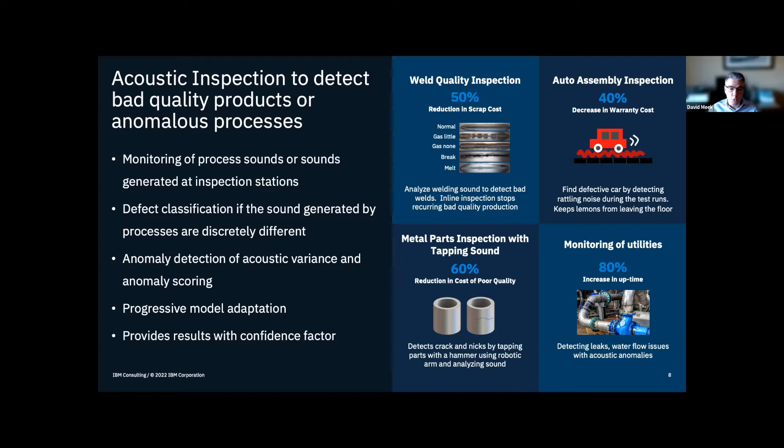Other use cases are using a robot arm to tap a bearing race, for example, and know whether it's cracked. This is big in ceramics and others. And then we also use it to monitor rotating equipment and others, to give early warnings to bearing failures and lubrication problems.

New in manufacturing and remanufacturing, we see a lot of the simple use cases have been done. More and more of the complex use cases require multiple models to get the performance output as needed. Here's a case in point: this is an auto frame and body company. They make frames that go into many of the popular pickups that OEMs assemble and sell here in North America.

Typically for all their welds, especially MIG welds, the only way they know if they're good or not is if they tear down the weld and cut it and etch it to make sure it has the penetration. They might do this once or twice a shift, but they might make 1,200 frames. So they just have to surmise that if it passes the QA test, all the frames are okay, and if it doesn't, they remediate all the frames. So there's a huge cost to that, and there's a huge cost to the OEMs if the welds begin to break due to incomplete welding in the field. All you have to look at are some of the more recent OEM recalls for frame welding.

So we've tackled this a different way with this manufacturer: let's look at every single weld. There might be 300 welds on, for example, an F-150 frame. Let's look at it using visual inspection with infrared cameras so we can see the heat and build models for the individual welds, their paths, and the heat penetration.

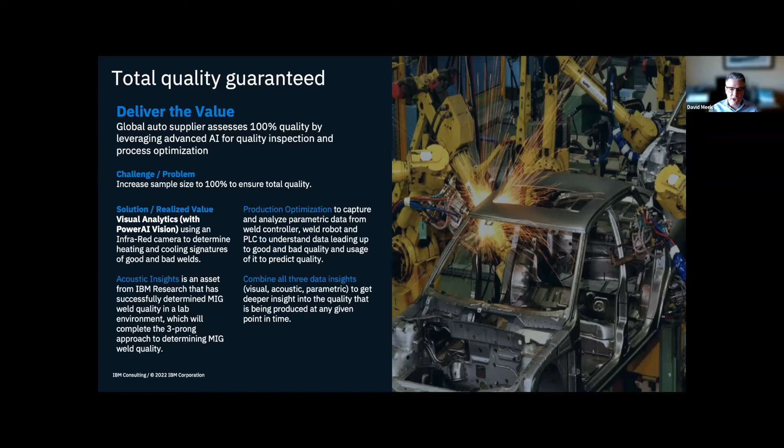And with these, we use 11 different AI models to be able to come back with a 90+ percentile and say, this is a good weld, keep going. It also uses anomaly detection to say, hey, you normally use a certain amount of shielding gas or a certain minimum current through the weld, and you didn't achieve that. So you need to check what's going on here, or stop the line.

With visual inspection, I'm going to go into more detail because that's used not only for automotive final quality. We're finding more suppliers and OEMs and remanufacturing using this to triage incoming parts. Is it complete? Is certain parts worn beyond repair? That early triage can have an objective view, freeing up people to handle borderline cases or make more value-added decisions.

This is launching a new line of vehicles. The workers are new, the vehicle is new, and they end up with a lot of quality issues. So what we've done here is just use an iPhone. It's programmable by the end engineers—you don't need data scientists, you don't need a huge IT staff. They take pictures with the iPhone, create a model which goes to the server or cloud, where it can quickly build an AI model and send it back to the iPhone. We inference it there.

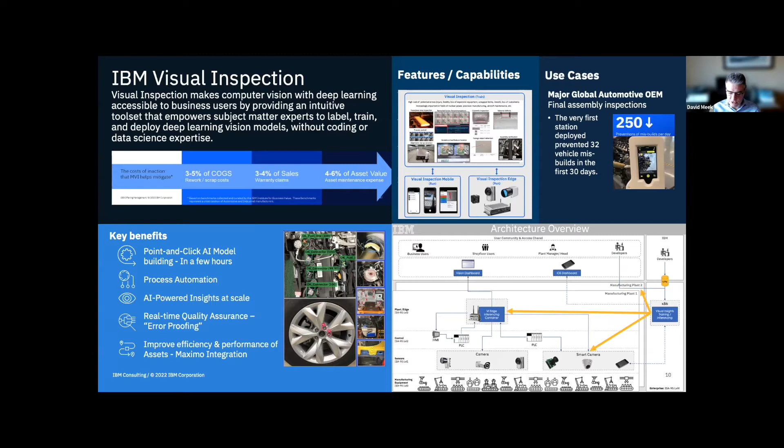We use a lot of other companies' computer vision besides IBM's—we tend to use whatever the client has a preference for. We have a lot of clients on AWS and Microsoft Azure, for example. Both have different computer systems. Just about every provider of computer vision has pros and cons, strengths. Sometimes it's a very IT, data science focused tool; other times it's very user-friendly. But the downside is it can only be used for very simple use cases.

And with that, I'm going to turn it over to Jim Little. He's going to walk through a process or reference that we use for remanufacturing, and an important aspect as you begin to apply AI to an existing remanufacturing process.

Jim? Okay, hey, thanks David. I'll do an audio check with you—coming through okay? Yes. Oh, perfect.

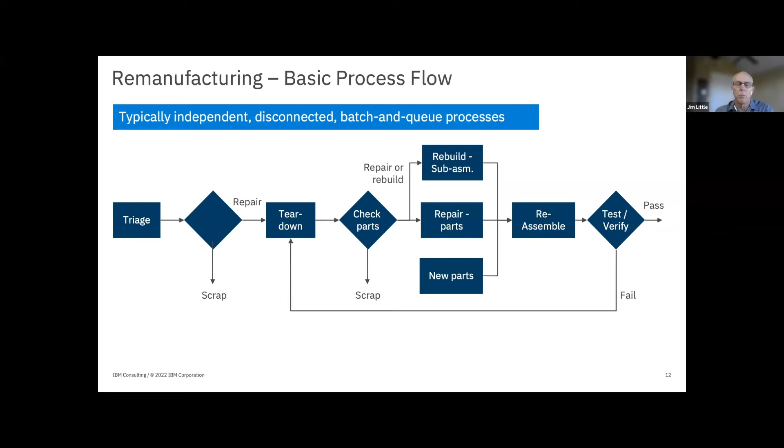But things flow through. Things come through, they get worked on, and they come out with success at the other end. But as part of, or requisite to, the technology application, I want to share a success story that cleaned up some of that base level kind of work first. So David, next slide please. Yeah, thank you.

So I've entitled this an Industry 3.0 kind of application, but really the message we want to convey here is building upon the ML, machine learning, and AI application, challenging organizations to think about building upon solid fundamentals, right? Make sure the foundation is right before we begin to build the next layer of opportunity on top of that.

In this particular case, the organization had much of that traditional flow I talked about earlier, where we didn't have people engaged, we had batches that were disconnected, et cetera. The focus over this 15-month journey, with multiple passes through it, was really around building what we call manufacturing, remanufacturing fundamentals, right? Thinking of the lean principle application of visual management, flow, value add, engagement of employees, problem solving, built upon daily management systems, et cetera.

And by honing that and really driving those fundamentals, those foundational kind of items, in place at the basics level, with crazy focus, rigorous focus around flow at takt time, we're able to establish these kind of breakthrough metrics. If you think about producing an asset now, remanufacturing an asset with less than 25% of the effort it used to take, 35x on the output or the volume side. Think about the lead time satisfaction for customers that feeds all of that. The business benefit that comes from building and executing on that solid foundation is pretty astounding.

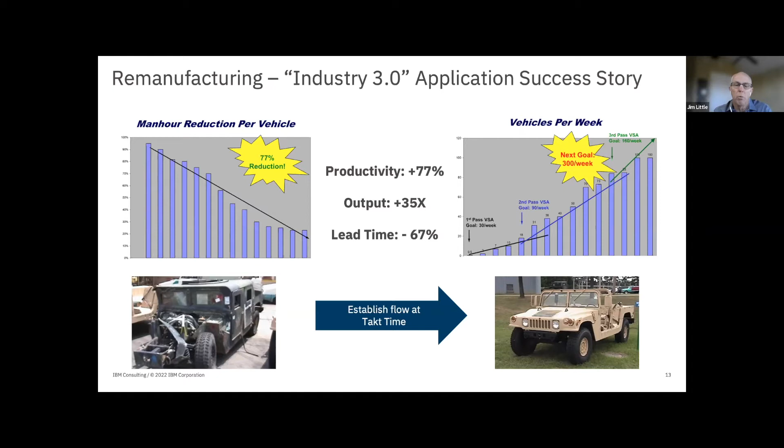So the lesson here we want to convey is the rigorous application of the basic principles at the Industry 3.0 level work before stepping into, or as requisite to, adding on top of and leveraging beyond with that piece into the 4.0 realm. And I'll give an example now of even better, or building upon that, if I could, David, on the next slide.

Right? So those familiar with value stream analysis and value stream thinking, it's the flow of information. And where can we apply the intelligence to get real-time feedback into the operations that support the flow that provides the value to the customer? And all of those insights, whether it's from the acoustical or the visual or thermal or energy consumption, et cetera, around that, where are those point solutions going to enable flow through the overall?

For example, technology on operation B can help improve that, but if that only bogs up at operation C or D downstream, are we really providing value to the end user through that application? What liberates the capacity is the key we would think about to create that flow. But everything from the cycle time to feedback on asset-specific instructions.

We learned this earlier on the activity as we were doing teardown. Let's consider or look at the other side when it comes through on the reassembly. All of those thoughts tie back in very strongly, I believe, to the idea of where the application is most appropriate, but certainly connecting knowledge so it flows with the unit and the product to the people who add value, the operators in the disassembly, repair, or reassembly, so they can make better decisions faster, higher quality output, and it really just leverages it even beyond on the business outcomes that you're trying to drive.

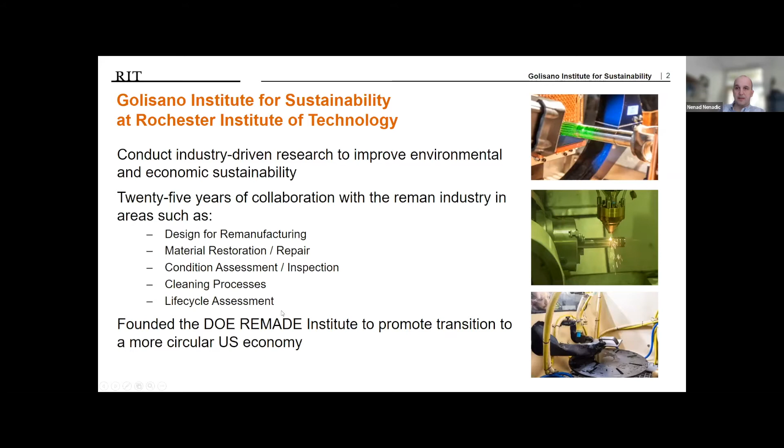We were leading the team that proposed to the DOE the Remade Institute, which is now promoting transition to a more circular economy. The material that I'm going to present today is part of a Remade project that was a collaboration between Caterpillar, CoreCentric, and RIT. This specific topic will be machine learning for health assessment of LEDs on printed circuit boards.

So this is more specific and more in detail, far less in breadth than what David presented, but one can see it as a template for some homegrown development of machine learning.

So the way we understand this business case and motivation for the machine learning is to enable automation and primarily improve efficiency. Those are somewhat widely considered good starting use cases. In this case, to speed the processing of PCBs.

Specifically, these operations like CoreCentric are largely manual right now, and they rely upon training technicians, and some of the tasks have become tedious. Over time, they make more errors as the day progresses because the repetitive tasks are not best suited for people.

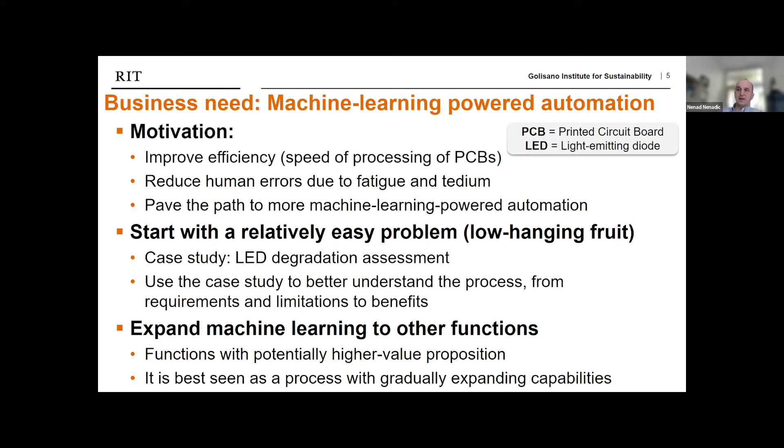So one of the commonly accepted approaches is to start with a relatively easy problem or low-hanging fruit that would allow us to complete and make a difference over a short period of time, and also give stakeholders an opportunity to see the process, then we can tackle higher value problems in the next round. This example that we're going to go through will illustrate this process.

As I said before, the specific goal here was to take pictures of PCBs and then isolate individual LEDs and assess their health. We have 3 PCB types. 2 of them are currently being assessed using visual inspection, and the third requires electrical test.

And the motivation is just as was described in the previous slide. Technicians take some time to train. These skills are not always perceived as high value skills, and the tedious nature of some of these jobs is a good opportunity for machine learning to improve the speed of operations and even long-term accuracy.

So there are, from a technical perspective, 2 machine learning models, 2 tasks. One identifies LEDs on a picture of a printed circuit board, and the second assesses the degradation related to that LED. Our approach was to put together a quick end-to-end workflow, starting with image capture.

Then isolating LEDs from the pictures of PCBs, and finally adding the health assessment. So we put this workflow together quickly and then iterated to improve upon the solution. We'll go through some of these in the next slides.

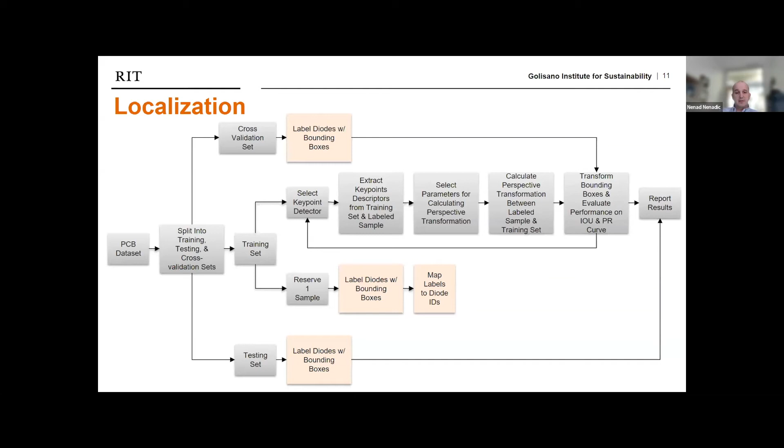I'll include a little bit of detail here on how we approach this. It starts with initial data collection—in our case, those are LED images. And then we try different models.

Then we train to adapt the models to the data, and then we validate it with different data, and iterate with a couple of different models. Sometimes we realize we need more data, so we expand the data set.

Before deployment, it's good practice to use a third data set that has not been used before. After deployment, there is opportunity to either expand the solution or sometimes adapt it. For instance, in predictive maintenance, models are more sensitive if they get recalibrated between maintenance intervals.

So here is the training. This is maybe a little bit too detailed, but it's just to illustrate the process. We typically split the data into a 70-30 ratio for training and validation.

In our case, it's often the case that the physical objects—in our case, diodes—have to be either fully contained in the training data set or in the validation data set. If they're split between the two, we will get misleading good performance, because these are very large models and they can easily memorize everything and then generalize poorly.

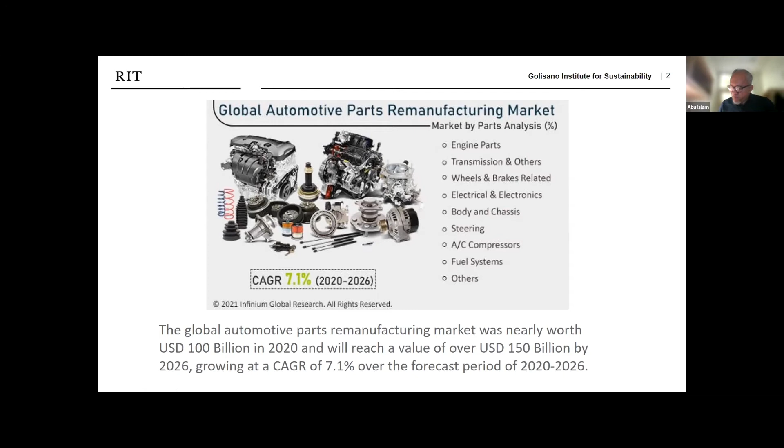As you can see, all kinds of automotive parts are slated to be remanufactured—engine parts, electronics, body parts, and so on. So it does warrant attention from the research community to improve its accuracy, efficiency, and to some extent, safety as well. So how are these parts collected?

Traditionally, these days the cores—the automotive parts coming in—are collected by what's called core brokers. Typically, they receive these parts in pallets, intermingled, and that's how they deliver them to the remanufacturers. What the remanufacturers have to do is then almost manually first sort this by type.

For example, is this an alternator? Is this a brake shoe? Is this a fuel injector? And then they have to sort them by model number.

And it takes time. Typically we've heard from one of our partners, Dieselcore, that in a minute they can do maybe 2 to 3 brake shoes, and their accuracy is probably in the low 90s. So they'd like to improve the accuracy and reduce the time in this classification.

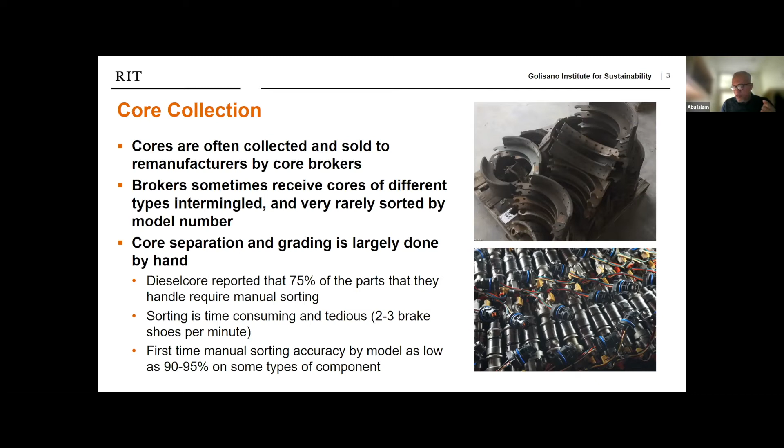So our goal in this project, in the first phase, is: can we separate or classify these parts into broad categories? For example, these are brake shoes, these are fuel injectors, these are alternators, and so on. That's number one. Then within each type, can we say, hey, this fuel injector came from Ford, this one is from Bosch, and so on—can we make this kind of classification?

And of course, we have to improve the accuracy to over 90%, with about 2 to 10 seconds per sorting time—that's the kind of guideline we got from our partner. In the long term, we'd like to classify these components based on their condition, how worn out they are, and we also want to identify if our system hasn't seen a certain part that comes into the inventory.

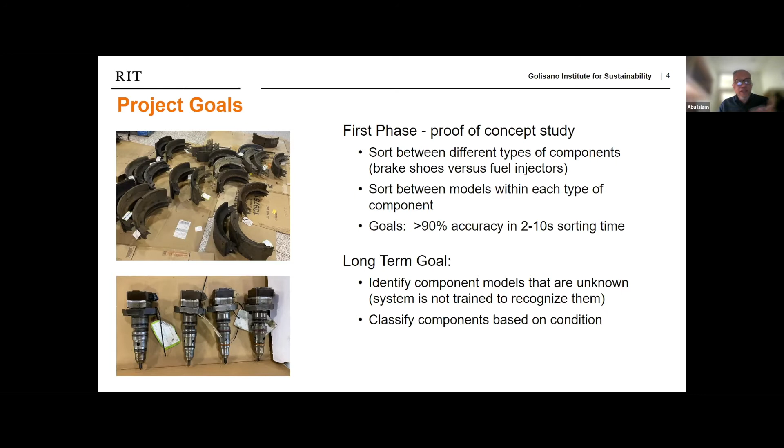So of course, as the title said, we are using a vision-based system. And for that, we need a lot of images for these parts. Typically, we don't get them from the field, so we have to generate them ourselves.

As we get these parts, we captured over 12,000 images. Our initial parts selected were brake shoes and fuel injectors because they come in large volumes, and they're also among the important ones to classify—that's what we learned from our partner.

The way we capture the images, we use a rotary table so we can collect images at different angles: top views, isometric views. Because as the parts come in on any kind of transport system, we can't say it has to be in a particular orientation. They can come in whatever orientation the user puts it in, so we have to be flexible to that. We capture images at different angles and also at different lighting conditions, because we expect that's going to happen on the remanufacturing floor as well.

We are using fuel injectors and brake shoes, and these are the different models we have in our inventory. For each of these categories, we have about 4 to 6 repetitions of the same model numbers. So that's the kind of parts and data we're dealing with in this work.

As Nenad alluded to, we are using transfer learning to improve our efficiency. Essentially, companies like Google and Facebook deal with millions of images to recognize faces, objects, animals, flowers, and so on. Not only can they classify, they can identify, and they've developed very sophisticated models. In the early portion of their model, they extract features from those images - horizontal lines, vertical lines, curves, circles - these are the kind of features used to classify objects. Since they have a huge database and have created this model, it makes sense to reuse that portion of the model in our work.

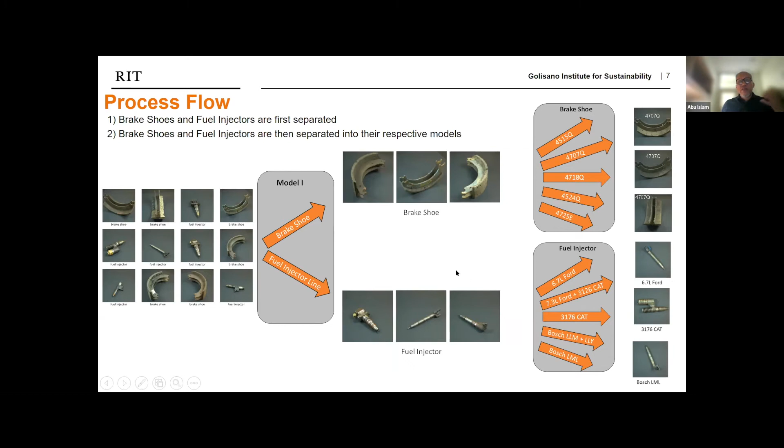Moving forward, this is the overall model we've used. There's a first model that classifies objects between brake shoes and fuel injectors. Once we've categorized them into those two categories, we bring in detailed models of brake shoes and fuel injectors, which subclass them into individual models. That's the overall structure of the modeling here.

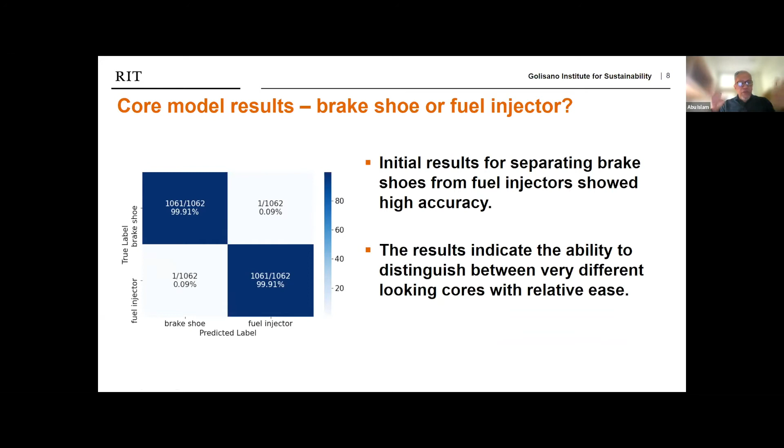Let's look at some of the results. As you can see here, to classify between brake shoe and fuel injectors we do very well - we're very happy with the results, over 99.9% accuracy in classifying between these two large groups.

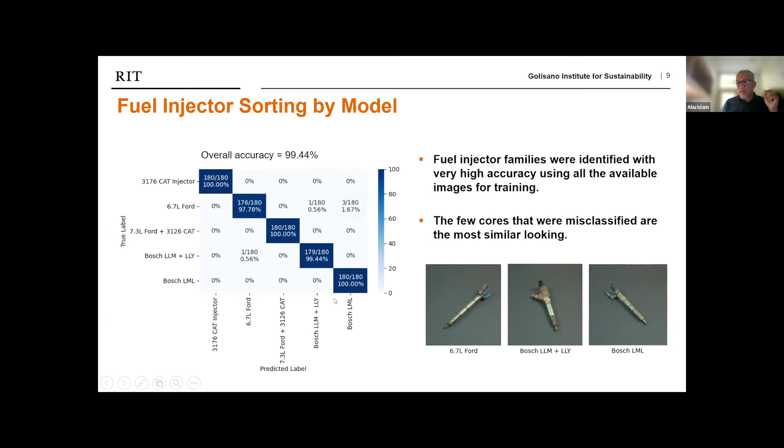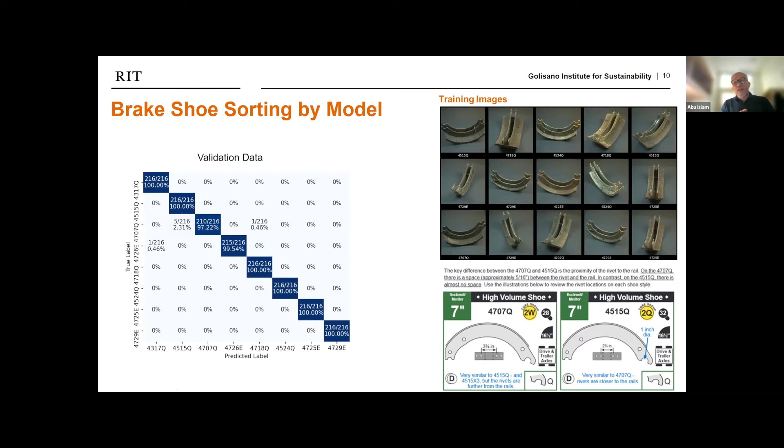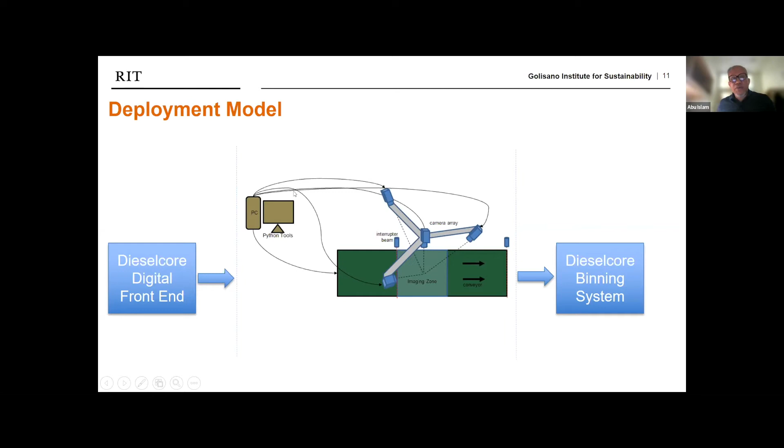We'll capture images and feed those images back to an analysis tool based on Python, as Nenad explained, and that will classify those parts into different categories. So in our labs, we have put together

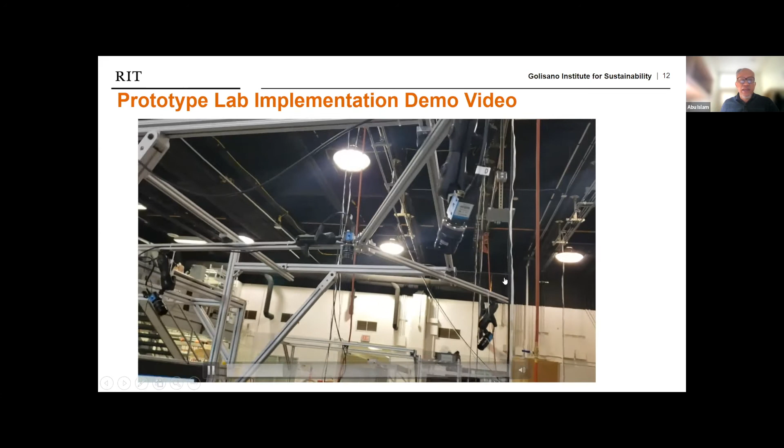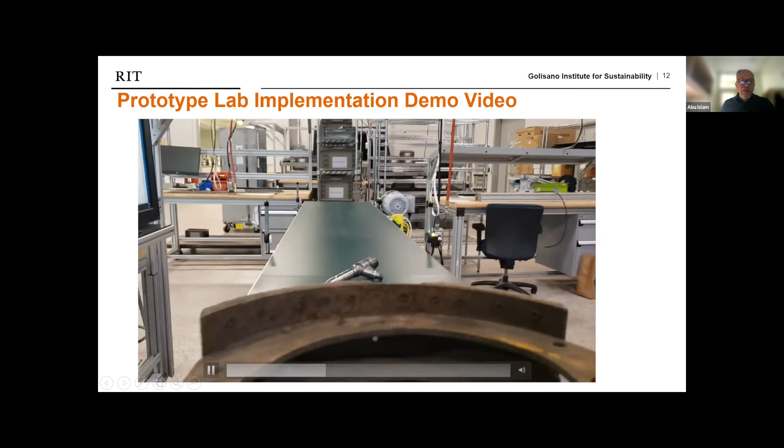the prototype. Hopefully the video is working for everybody. So this is a conveyor system, and these are our multi-camera gantry. This camera will take the top view, and these three other cameras will take the isometric view of the object. And in this conveyor, the operator will place the parts as they're coming in from the pallets, and these parts will go under the camera.

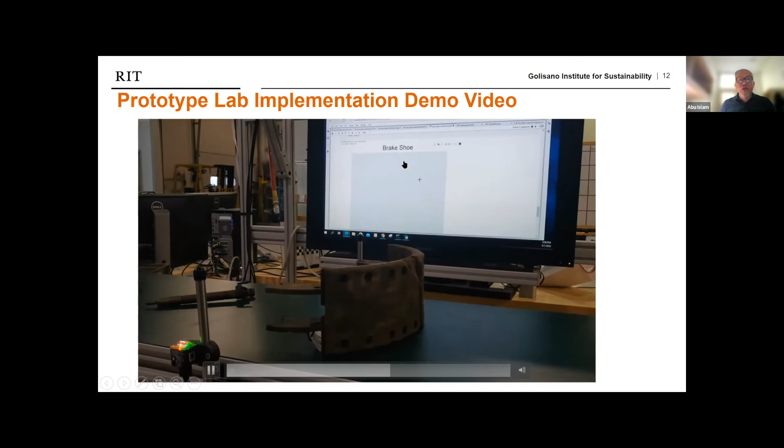As the part goes under the camera, it's stopped by these sensors. As the sensor detects, we stop the conveyor and take the picture. And as you can see, we detect this and identify this as a fuel injector. Then a brake shoe comes in. We identify this as a brake shoe, and we continue.

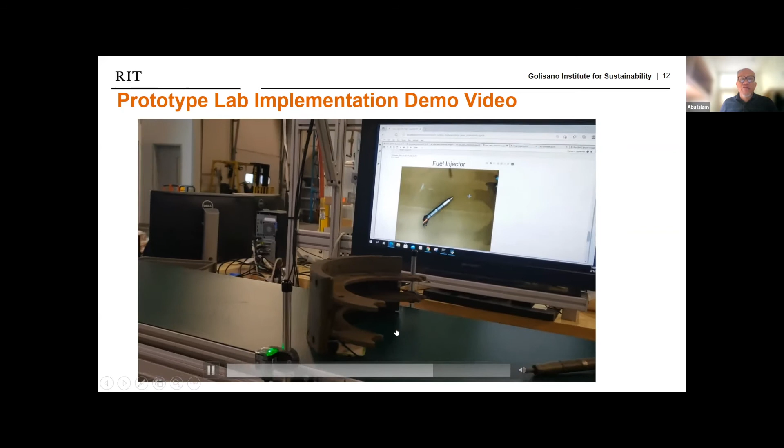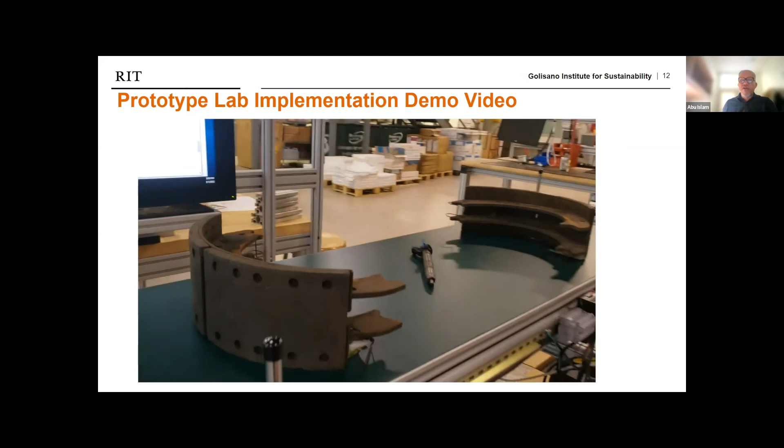Of course, we are classifying them into categories as well. It's giving up that information in the details as well. And as the parts go to the end of the conveyor, of course, they'll be picked up by a robot or additional binning system that our remanufacturer will have. So this is the prototype that we are maturing in our lab, and this is the system that we want

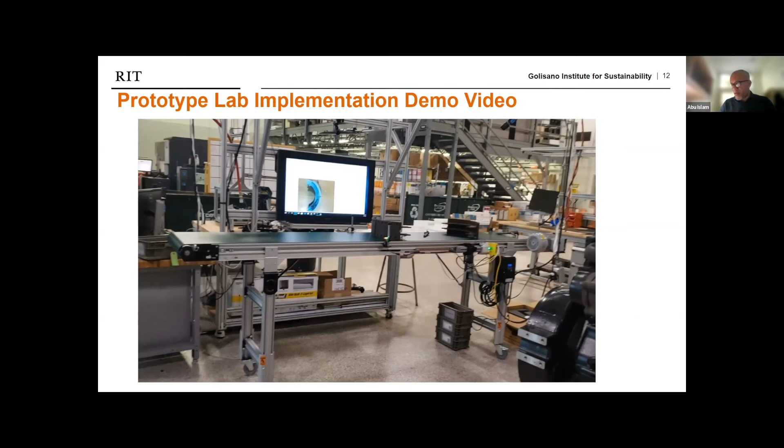to deliver to the remanufacturer to make it part of their system. In summary, going forward, our next steps, of course, is to demonstrate the latitude so we can basically detect parts under all kinds of manufacturing environments. We want to detect out-of-class data sets. We want to investigate other kinds of parts in addition to brake shoes and fuel injectors, like alternators and whatnot.

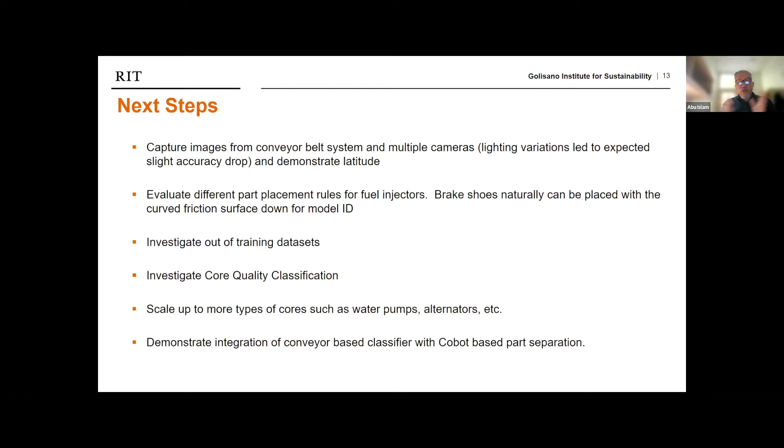And of course, we want to work on the end binning as well, some kind of cobot-based separation of the parts after they're done at the end of the conveyor system. So this is what I wanted to present for this presentation. Thank you.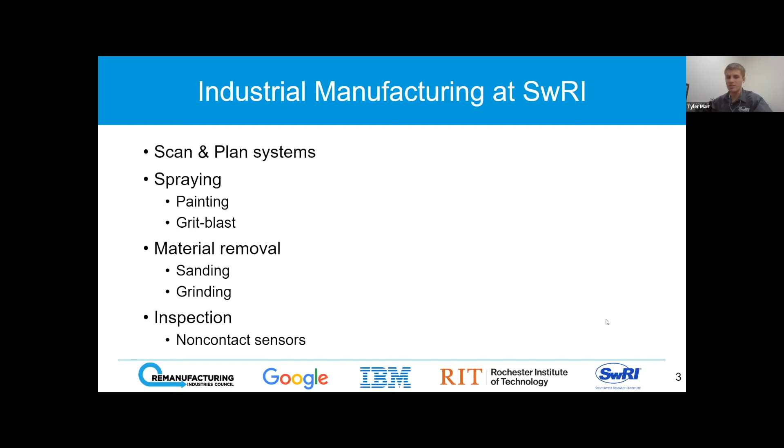So what do we do at my group at Southwest Research? We create a lot of scan and plan systems, and I'll define that in just a little bit. But what these systems accomplish is different spraying applications through either painting or a grit blast system. We do a lot of material removal, so like sanding of materials or grinding. And we also do inspection, which may be non-contact inspection. We do several other things that fall into these different broad categories, so a very wide range.

And we accomplish this through a process that we like to call scan and plan. So scan and plan is kind of like what the name implies. It's basically you do a first step of scan. So we have a sensor on an industrial robotic system, and we use this sensor to localize either a known object with a 3D sensor, or we can actually generate a mesh of an unknown object at a known location.

And then once we have this object and we know where it is and exactly what it is, we can actually generate specific waypoints on it. So say it's a sanding application, we say, oh, we want to sand at exactly these points. And then once we know the waypoints, we can plug this into a computer program that will output a robot trajectory to say, okay, to hit all of these waypoints, we want to do this exact motion with this robot arm.

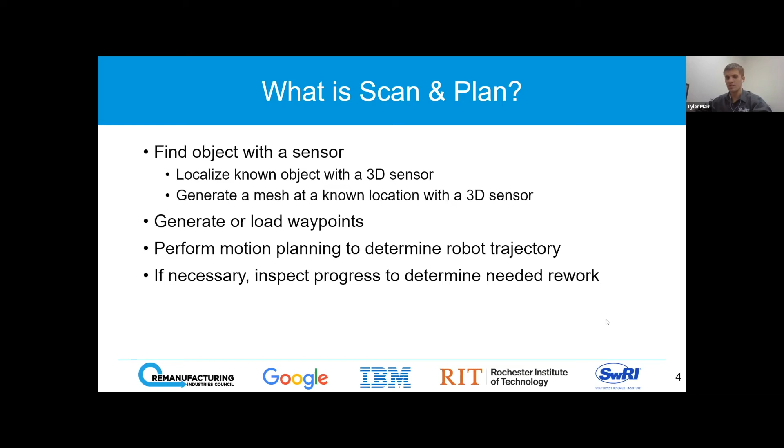And then sometimes if necessary, there's an inspection process to follow to see if we are finished with the process or need to keep going. So a nice summary of that can be seen in this video.

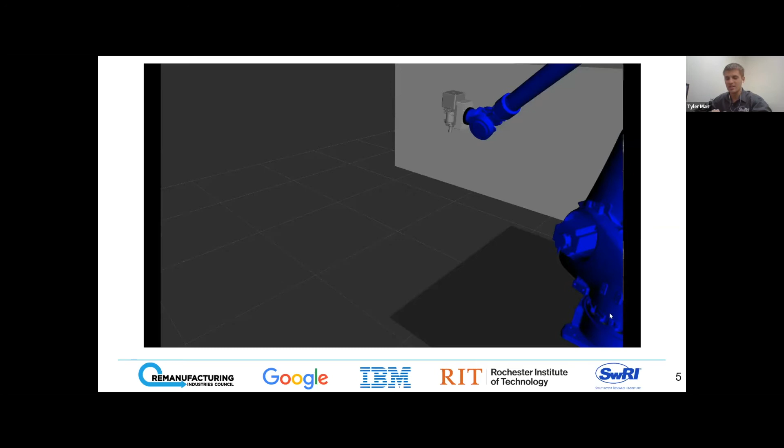So we'll see a big blue robotic arm, and then at the end of the arm, we see this little gray object, and this gray object is a compliant end effector. So this is what you'd put a sanding tool at the end of, and then you actually have a little bit of compliance, so you can push against the part and don't have to be perfectly precise, and you can input a specified controlled velocity of the sanding spindle and required speed.

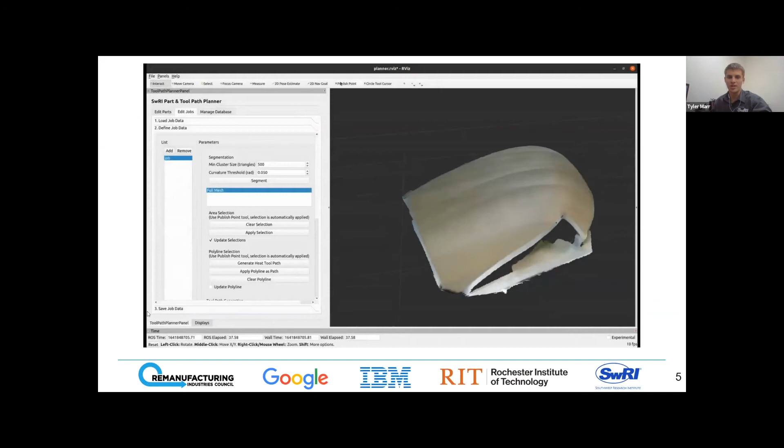And so the first step, like I mentioned before, is the scan step. So here we have a 3D sensor on the end of the robot arm that's moving across and generating a mesh with a pre-canned path of the robot. And so the robot's never seen this part before, and we just generated a mesh, and then we load it into another one of our softwares that allows us to generate waypoints on the part. And so now you can see there's a series of waypoints. And now once we have those waypoints, we can pass those back to the computer program and actually generate a motion plan. So now going from no knowledge of what the part was, we actually have a robot that's ready to execute a trajectory and start sanding the part.

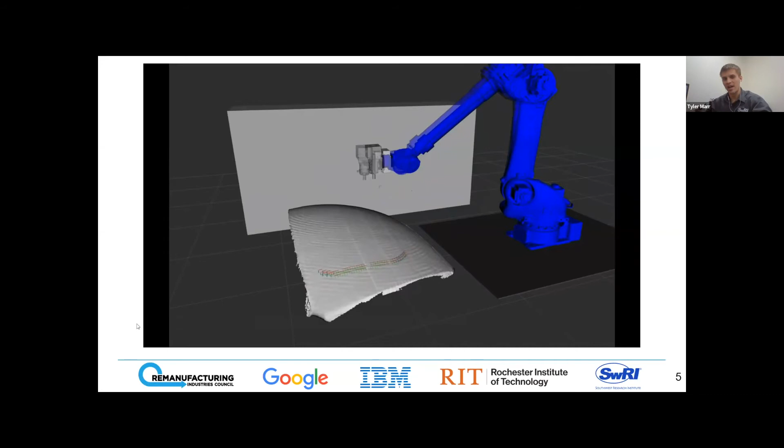So where does deep learning fit into all of this? All of those tasks I described, yes, require things that fall into the category of AI, but I said I was going to talk about deep learning, and there wasn't really any deep learning specifically in that process.

So with finding the object with the sensor, maybe you want to crop the live point cloud that's coming in with semantic segmentation. I'm going to throw around a couple specific deep learning terms here, and I'll explain them later in more detail. And then, or maybe you want to generate waypoints specifically on specific areas and you want to identify those areas, you can do that with semantic segmentation. Or maybe your robot planning is taking a long time or is really complicated, and you could leverage reinforcement learning to solve those problems.

And then also for inspection, we've seen a lot of examples of image classification. This is a perfect candidate for that as well. We can use image classification to really help inform the process.

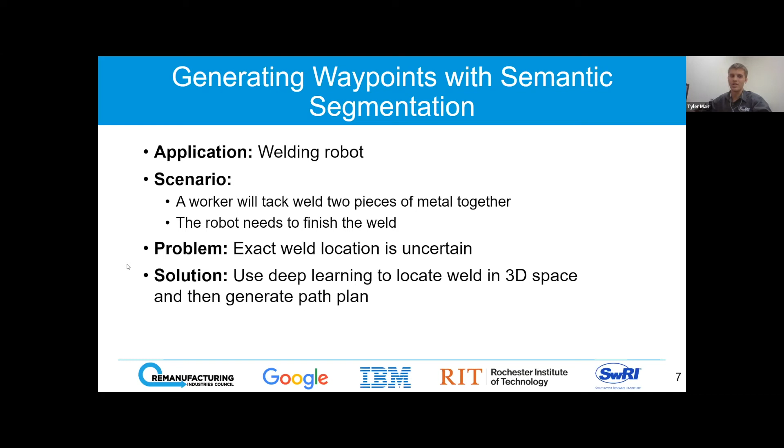So our solution is to use deep learning to locate this weld in 3D space and then generate the path plan. So how are we going to use deep learning to do this?

So we can use what's called an RGBD camera. This is what was used in that first video I showed where we generate the mesh. This is basically a red, green, blue plus depth camera. So you can put these on a robot, and now you have a regular image being output from the camera, but you also, along with it, have what's called a depth image, which instead of red, green, blue values being populated, you have depth data being populated. So how far away is that point?

So we can then use semantic segmentation to find the weld. So what is semantic segmentation? It's basically you take in an image and you label every single individual pixel with a category. So in this instance, we'd label every pixel, is this the location of where a weld should be, or is it not?

Once you have all of those labels, you can actually map the 2D data onto the 3D data that we've generated. Then you can extract that 3D data, if you know where the camera was at that time, into 3D space. So now you can know exactly where the weld needs to be in 3D space. The process looks like this: you have a scan pass that finds the weld, we extract the weld location into 3D space, and then we generate waypoints from that weld location and motion plan from those waypoints, just like before.

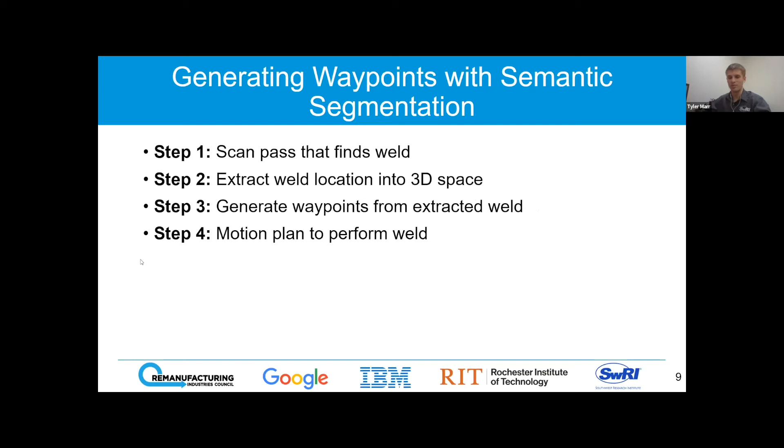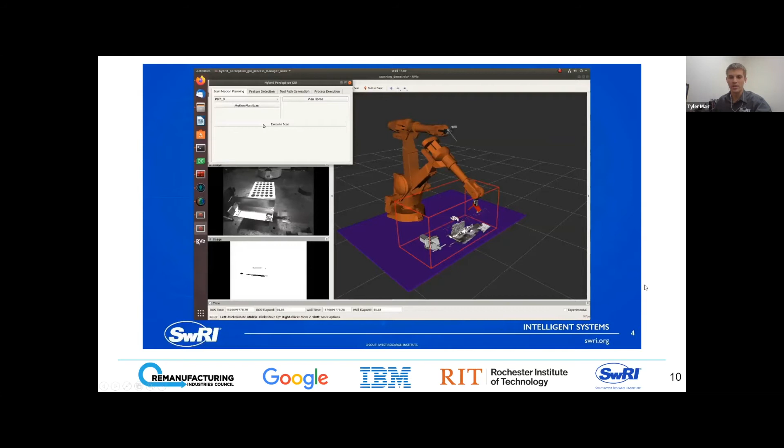If I play this, you'll see the robot move across and identify where the weld is. You can see it move with the picture as it's moving, and we're generating all that information, translating it into 3D data.

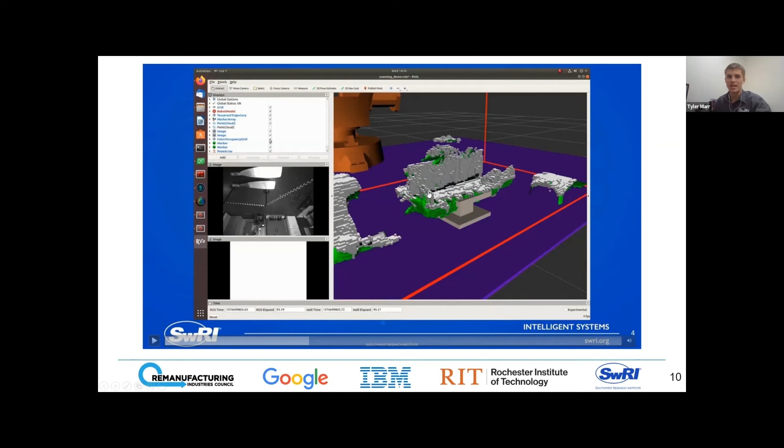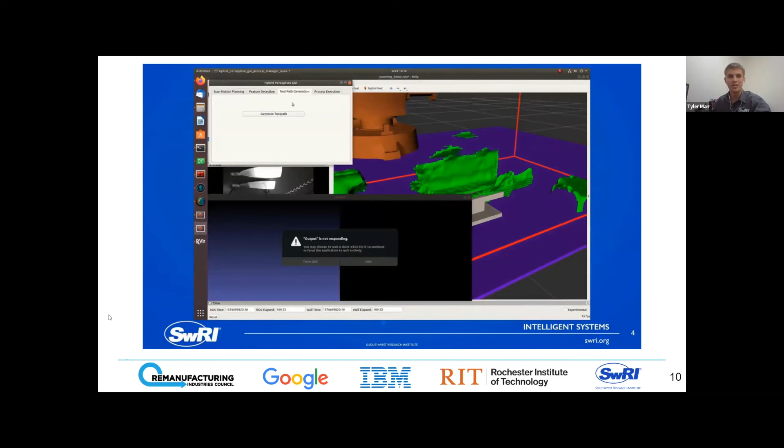Now you can see a point cloud of all the points we captured, with a black line going across the middle. This identifies where the weld is. In addition, we generated a mesh at the same time, so we can say there's an object here that we want to avoid hitting. Then we immediately generate a toolpath from that, a set of waypoints. Once we have those waypoints, we can generate a robot motion plan, which you'll see a preview of right here. Now the robot's ready to weld.

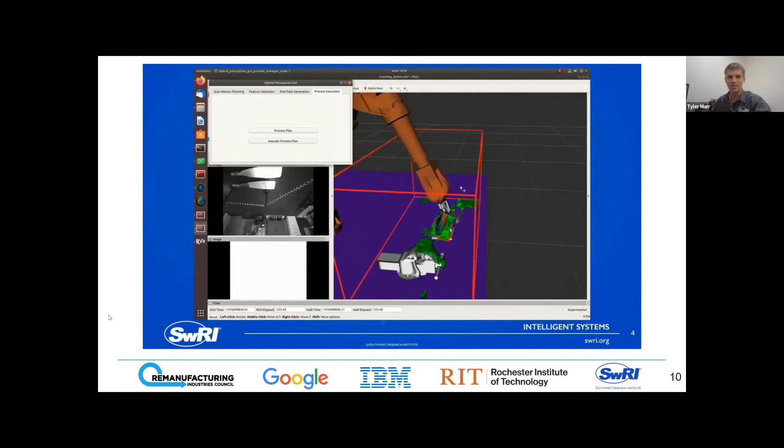This part could be presented in several different orientations. It doesn't have to be precise, and the robot can still find it and finish it.

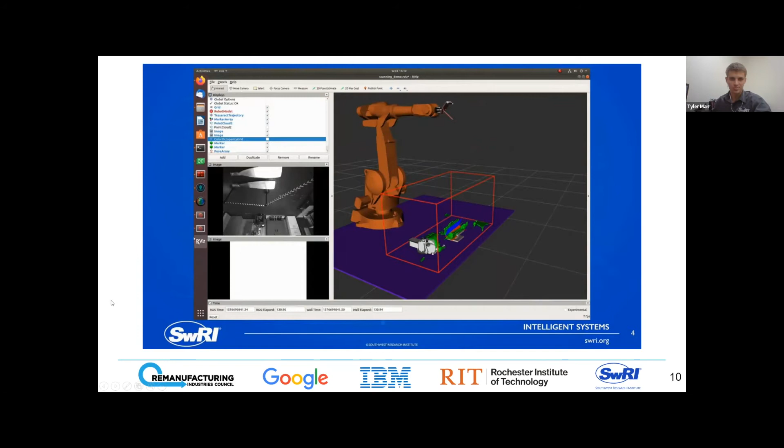Next application: motion planning with reinforcement learning. Say you have an application where the robot needs to perform an inspection in a confined space. The scenario is a robot enters a tight space with a large end effector, but the base of the robot always starts in a different spot, using the same geometry each time. So you have the same tight space and same end effector, but the robot's position relative to that space changes. The problem is you can't hard code the path, because even though it might be a complex trajectory, it changes every time you do the inspection. This means traditional motion planning can take a long time. The solution is to use deep learning to create a model that can solve this problem quickly and repeatedly.

So how can we do this? We can use reinforcement learning. Reinforcement learning is a method where you train a system by rewarding good behaviors and punishing bad behaviors. Over time, the model learns to do more of the things that lead to more rewards. So you set up a simulation of the environment, set up many possible configurations, and then create a reward function, which is one of the trickiest parts of this process. Then you run through thousands of iterations offline in simulation until it has learned how to actually perform the task.

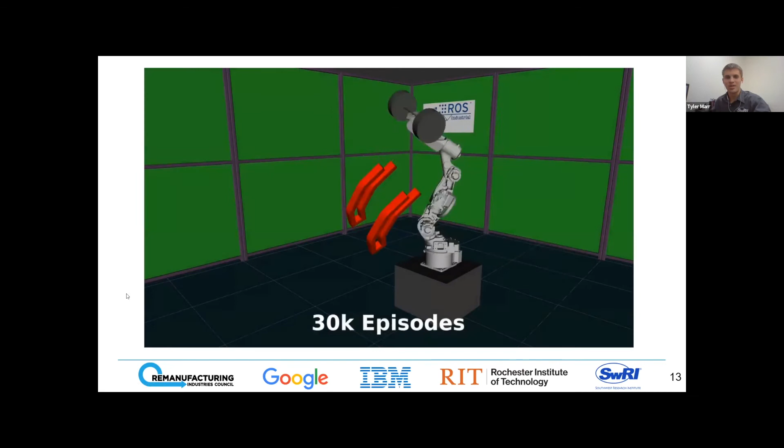Here we're going to see a robot with this large barbell-shaped object trying to fit into this slot. At first, the robot doesn't have any idea what's going on; it doesn't even really recognize what the goal is. It just gets rewards as it gets closer to getting the part into the slot, so you'll see it randomly move along. As the episode counter moves up, you'll see it get closer and closer, finding its way to the beginning and then slowly finding its way through the slot. At the beginning, it's moving around just kind of randomly exploring the space, and after a little bit of time, it starts to say, oh, I should probably go up to this area.

And then a little bit longer, it starts to figure out how to actually get into the slot without colliding. And then a little bit longer still, it's actually figured out how to get all the way into the slot, into the bottom.

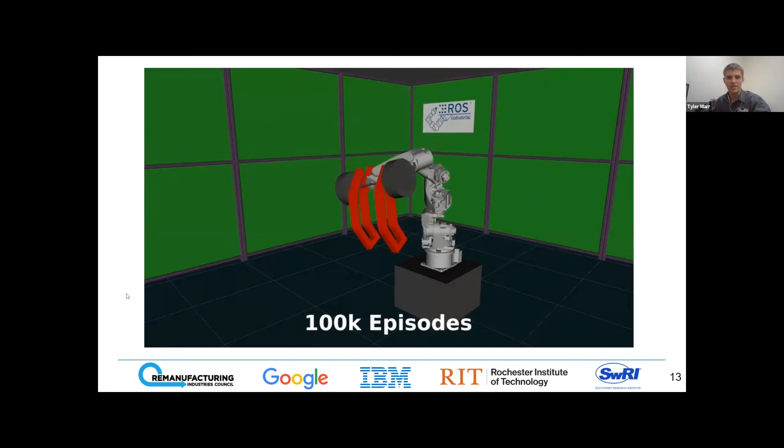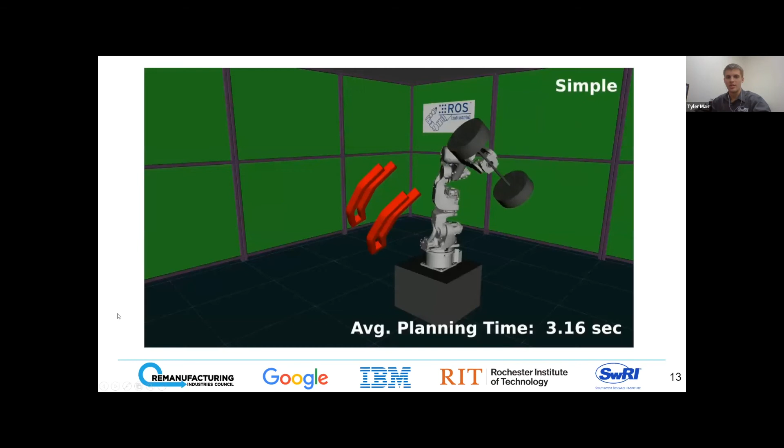Once we have those results, we were able to smooth out that data because it's still a little shaky, and get these final performance results. So we can see it quickly planning from all different configurations, from all different positions.

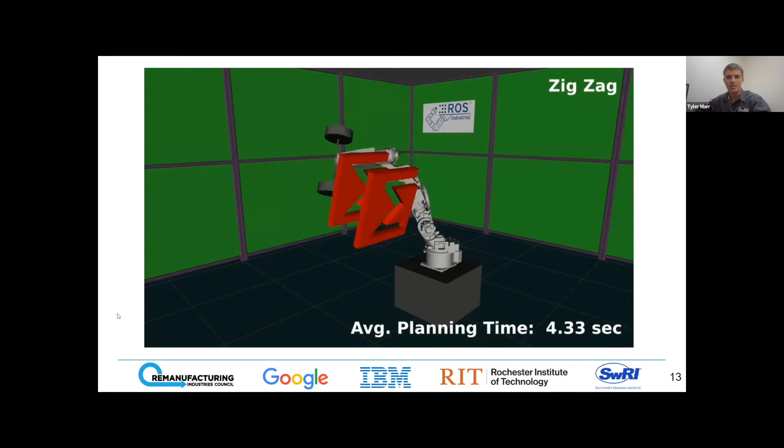And then we further trained this on different parts as well, and it was able to learn how to navigate those parts too, even including really complex, tricky shapes where it had to loop around multiple times. So this can be leveraged for many systems.

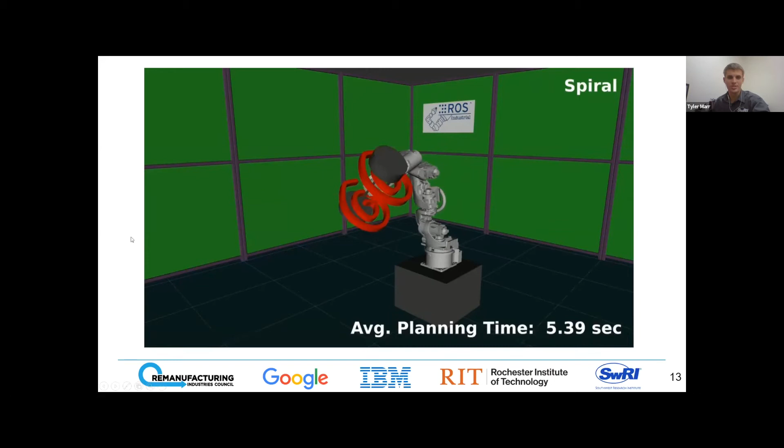And then finally, we're going to talk about inspection with image classification. So this is a sanding robot, the same one I showed in the very first video. The scenario is a robot is set to sand the top layer of a large part, but underneath that top layer is a sensitive layer that must not be damaged. You have varying thickness of the top part, and the robot must reliably sand to completion without causing damage. So this is a relatively simple task for a human to perform.

A human can just see, oh, that area is sanded, let me not sand there anymore, or this area needs more sanding, I'll focus there. But it's trickier for a robot because you can't hard code a path and say do 5 passes over this part, because you might just damage the part. Or if you're too conservative and say we'll just do 1 pass, then you'll have a lot unfinished. You also need expert judgment to determine what qualifies as fully sanded, and that varies from system to system. So our solution is to use deep learning to create a classification system that can identify sanded areas and then skip over them.

So how can we do this? We can use a 2D camera attached to the end of the robot, and we can collect hundreds of images for training the system. We also have to deploy a system that's easily trainable in deployment, because anyone with experience working with these classification systems knows the system is highly sensitive to the environment. If the lighting changes, or if you don't have a huge range of environments in your initial data set, it'll fail whenever, for example, you trained everything in a really dark room and now you're suddenly in a really bright room, or you have reflections off the part from the lights.

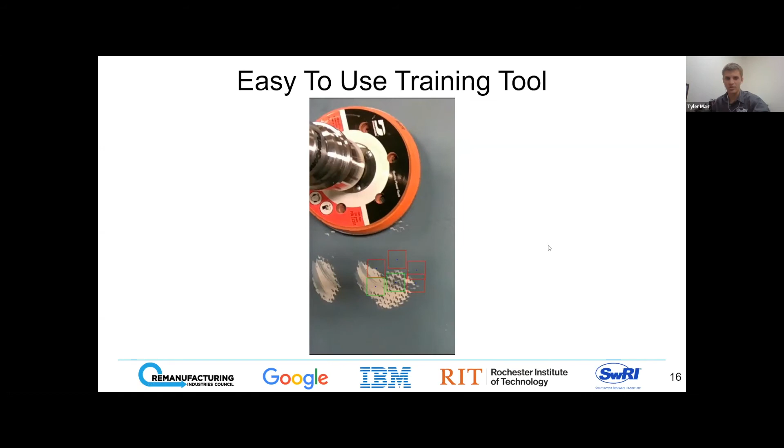So what does the overall pipeline look like now? The beginning of this is the typical scan and plan fashion plus a little bit extra that we added on. We scan the workstation, generate a mesh, create waypoints for the robot to sand, and motion plan to sand the part. That's what we showed before, it's pretty much our standard operating procedure.

But now, while we're sanding, we actually use that camera and the live data to classify waypoints as sanded or unsanded. Once we mark a waypoint as sanded, we remove it from the list, and then we replan the motion to sand only the unsanded waypoints. If you repeat this process over time, eventually you'll get down to where everything is sanded.

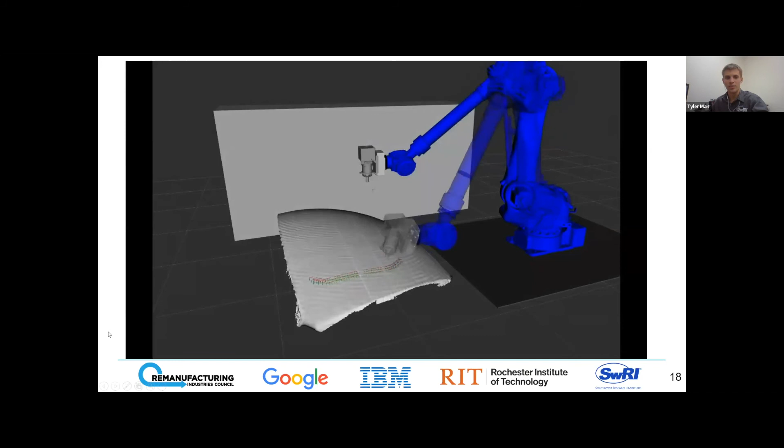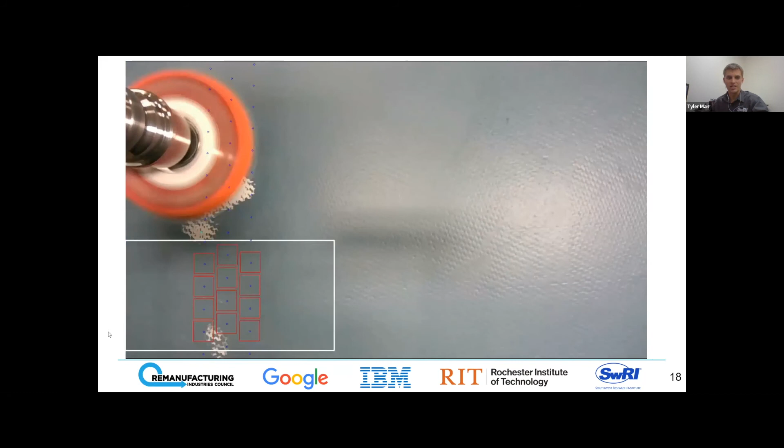So if we look at picking up where we left off, we have the robot executing the motion we were executing before. Now we'll go into a live feed of that robot actually executing that motion. You can see all these blue dots represent the waypoints, and the boxes are classifying the live data. We can see there's a sanded section in the middle there, so now the robot goes back and skips over that sanded section. If you repeat this process long enough, eventually everything will be sanded and you don't have to worry as much about damaging that sensitive undersurface.

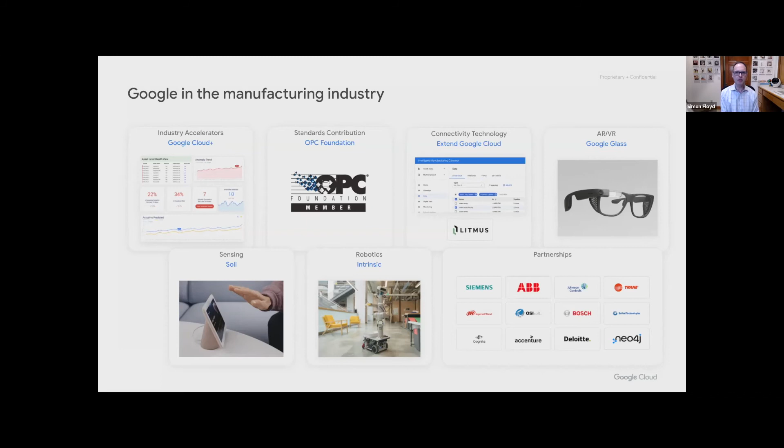Furthermore, across the portfolio you'll see other products, such as Google Glass as an example, a topic I talked about before, which was augmented reality. Closing things out with some of the other investments we've made across the Alphabet portfolio, such as Intrinsic, which is focused on artificial intelligence for robotics. And in some circumstances, we also have core technology that we use in our own products that we offer independently for people to use, such as the radar sensing capability called Soli.

So to continue on, what do we do with this type of technology? Here's just a very quick visualization of our line running and manufacturing a Pixel 4a phone, so a couple of generations older. Obviously we've been doing this for some time. I can show you this version, but I can't show you the current ones. Just some of it we have to keep secret, we can't be totally open with everything.

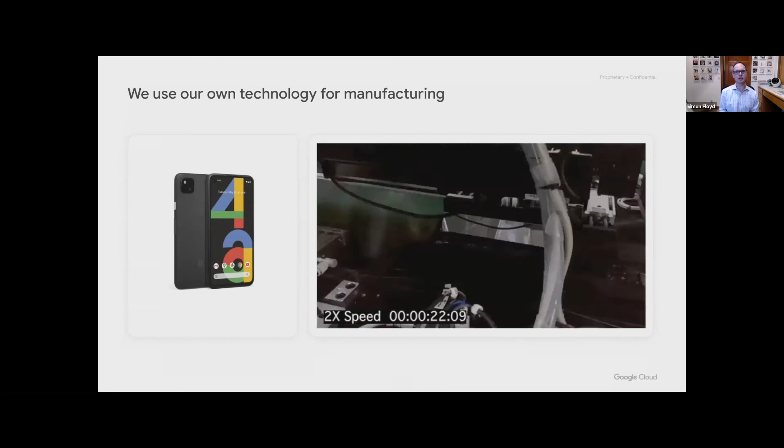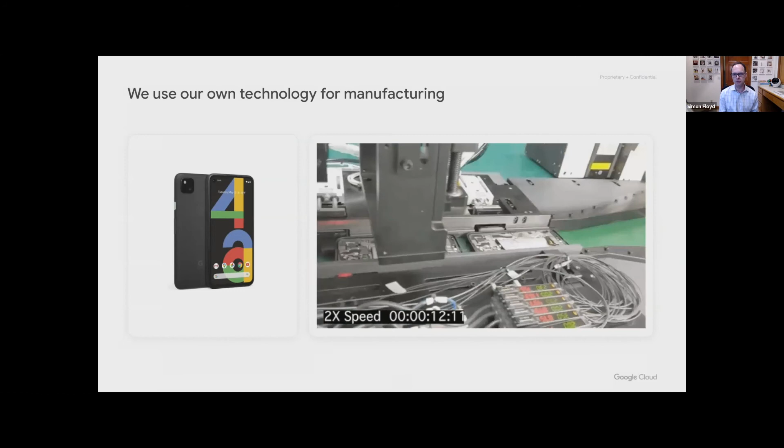But here's an example of how we use vision inspection types of capabilities. One of the reasons why we like this style is it's very flexible. So we can create an iteration, a new design, which might be accommodating a supply chain restriction that we may have, or it's for quality improvement or new features or functionality. And then we can modify our quality inspection almost on the fly, so it gives us a lot of agility and efficiency.

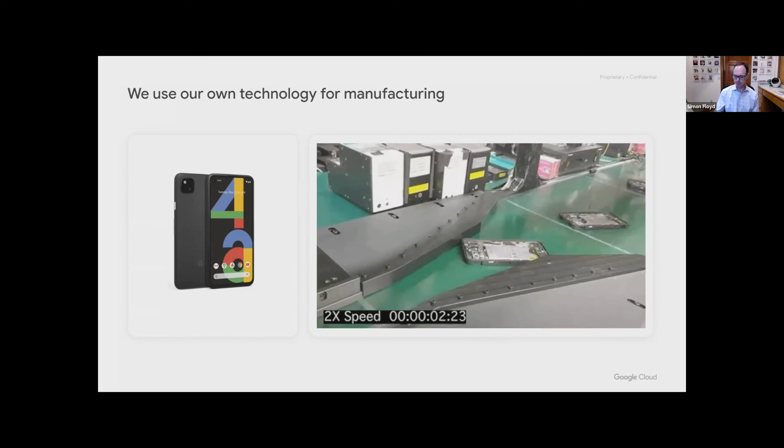I wanted to mention that because that type of technology is what we feel would be really pertinent for this industry as well. But first, to get there, I need to describe what some of the problems are as we see it.

For me, this is kind of going back in time a little bit because I've spent a few years working in construction machinery equipment, in particular data analytics and AI in this space. So the challenges of remanufacturing are really prescient for me, I've felt a lot of this personally. So it's a question of how to solve this problem all up, rather than just discretely going after one or two things. I'm thinking more holistically, how do we go about this?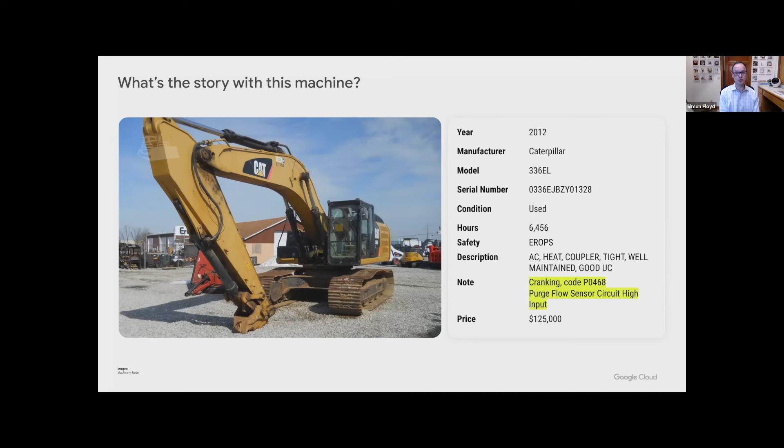So continuing along with the same piece of equipment, one thing we notice is that it doesn't come with a whole lot of history. We don't know a lot. Maybe it has maintenance records if we can find the dealership it's been to, or someone who's been taking care of the service—manual records, or perhaps a digital record we might be able to locate—but it's not carried along with the equipment. We can't really see it to know for sure. And that could be a really big decision point for us up front.

So if we're trying to create a risk model, what do we believe we need to replace before we even start inspecting and tearing down a piece of equipment? We don't have a lot of information, and often that's actually excluded. We just go to standards of practice—we go in, start to do a tear down and inspection. Very costly, takes a lot of time, takes a lot of labor.

The other thing we could say is it's not as if we're without data. We could go to a diagnostic computer, go to the ECU, and download some information. These systems generally don't do a particularly good job of recording—you may get whatever the most recent trouble codes were, or some sort of identifier, but you won't see all the other ones that occurred. They will have been overwritten. So the amount of history we actually have there is very small.

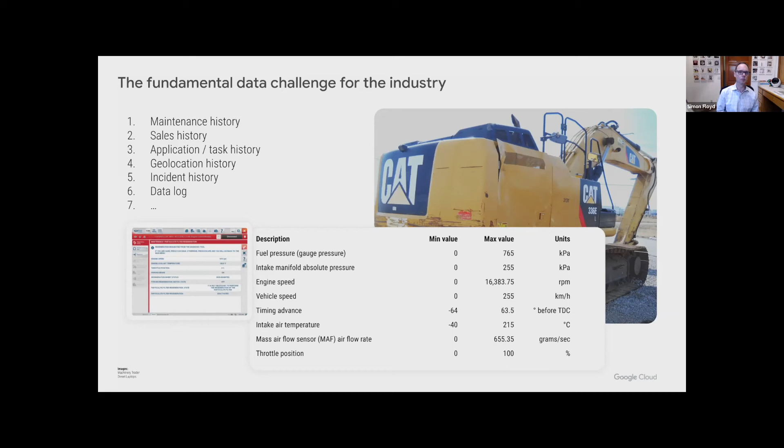So if we take it a step further, what would we want to know if we had the opportunity before we start any type of refurbishment or remanufacturing? This is where there's an interesting play to think about the world's data. And self-servingly, this is what Google Cloud believes we're good at doing - bringing this information together. So now it becomes a question of how much of that world's data is going to be useful for this application. It doesn't take too long to put it together. If you just ask, what would I actually like to know? First, I'd like to know where and when and how it's actually used. So the geospatial information is very interesting.

Was it hot climate, cold climate? Was there a humidity factor? What were overall temperatures during its operating time? Where was it moved to? Different locations of this nature. And then, of course, were there any kind of incidents that occurred that I can't see? There's generally no type of telematics that we can gather off the machine for that, and yet that would be pertinent to understanding what we may need to fix, especially if we're trying to be efficient in our overall operations.

And then we're very challenged with what is the maintained condition of the very critical and expensive components, say like an engine. So the information is out there, and we know that. Some equipment manufacturers have really advanced telematics - they have a very good history of things that occurred - but it becomes a question of how fine-grained is that information to make it useful for the way we'd want to inspect, understand, and predict its forward-looking performance.

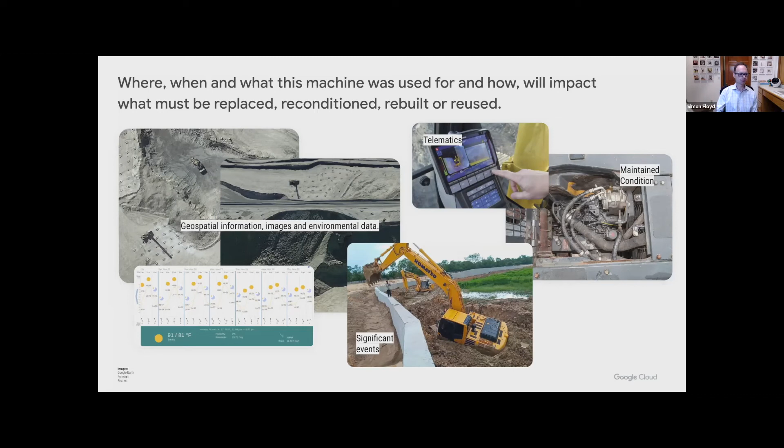Why I think this is so critical is that it doesn't predicate itself on having a very large onboard computer to gather the information - although this would frankly be quite useful if we had it, but we don't always need it. We can just run through a test procedure of the equipment itself and then take that data stream and learn from it. This could be the difference between what is a good and bad part.

As an example, in a testing procedure, if this piece of equipment came in with no diagnostic trouble codes on it, it looks like it might actually be good to go - but taking the time to do secondary inspection may reveal that a particular component should be replaced, because its longevity perhaps is much shorter than we would expect for the warranty we'll provide on the equipment as it was remanufactured. This can also be another way to certify the equipment for quality, because we can project forward what that performance will look like.

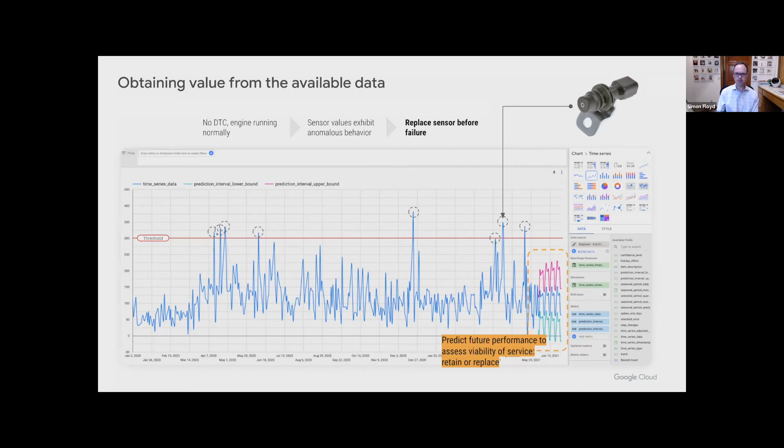To help, what we have done with our technology is pre-train 3 models so that there is a minimal amount of image data that's required. One of the big challenges of the industry is that machine learning generally requires quite a bit of information to get an accurate outcome or predict forward performance. So we've pre-trained 3 circumstances, and now around 100 images or maybe even less gets you the accuracies you're looking for.

It looks for 3 circumstances. It looks for assembly conformance - if something is actually in place, and if it is in place, is it aligned correctly? The other thing it looks for is simply whether there's any type of surface defect, for an object, as an example, scratching, things of this nature that would generally occur on the surface. And then finally, just by telling it what is good, it can work out what is not good or what is just an anomaly and start to flag those individual areas.

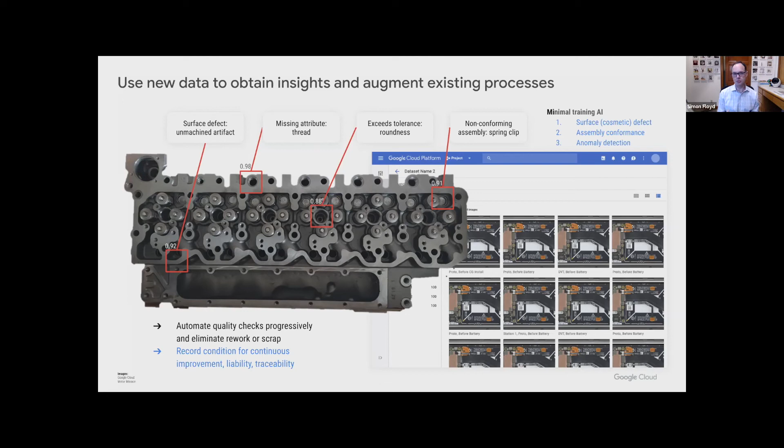Now, the other thing I like about these types of solutions is it gives us the opportunity to record the information itself. We might want that for product liability reasons, or we might want it just for learning, or we may need it in the future when we're trying to work out if a change in a particular process has had an impact. We'll have the historical information.

Now, you know who's really good at doing historical information, and this is coming to my point about sometimes why we need to have a lot of information or a lot of data. Aircraft are really good at it because they have something called a quick access recorder that stores an enormous amount of information. You can have maybe 10, 20, 100 flights of information that can be recorded there. Generally, it ends up being in at least the gigabyte range, if not terabyte range of storage that it can provide.

And it's extremely verbose and very fine grained. So when we think about that sensor example that I gave before, which I think was like a speed sensor that you would see sit on top of a flywheel, that would be no problem in this circumstance because the type of sensing that you have on an aircraft is vast. We would be able to get down to things like exhaust gas temperatures and so on without any question. And we would have, importantly, a time series of that information that we can put into one of those tools that would help us understand if there is anomalous behavior, but it would also help us understand what forward-looking performance would look like.

Take it one step further, and something that's very popular in this industry - if I'm not mistaken, it was kind of invented by this industry - is the concept of remaining useful life. One of the reasons why this is a very important metric for us in many regards is that it doesn't just signify when there can be a potential failure, but rather in its operating life where it's just no longer going to be efficient. Being able to define a threshold of where that inefficiency occurs is really critical, and those same types of practices can be taken forward in our industry as well.

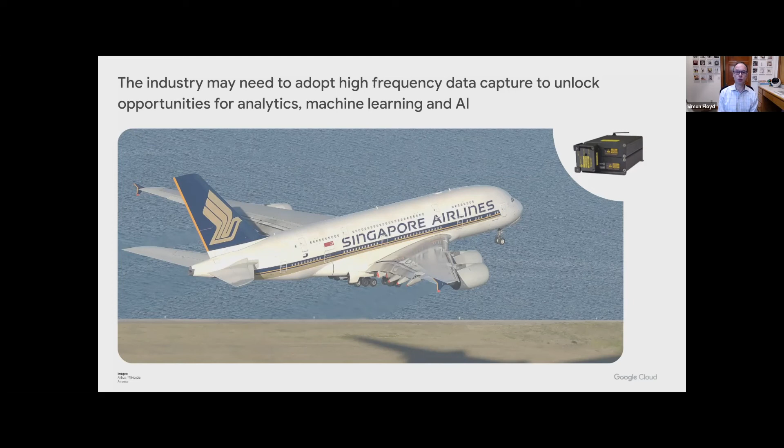So to wrap things up for you, I was thinking about how we would go about solving the problem if we had all of that type of information available. Now, with the example of the Airbus A380 that you saw there, it only has some of the information. In fact, in this particular chart, it has more like what occurs during that phase of maintenance and ownership. It has that information, which is an important part of the overall data value chain. There's no question about that.

But from an organizational point of view, if we were taking that aircraft through like a Schedule D, where we're just going to tear it completely to pieces and start replacing absolutely everything, or we were taking that Caterpillar excavator in and we're going to do a tear down of it anyway, what other types of information do we need to work out what the impact will be to our supply chain, what the impact will be to our manufacturing, what the impact will be to the cost of the equipment when it goes back out. If it's an aircraft, it's like, what is the overall capital expenditure that we've put into our operating equipment?

If it's that excavator, it's at what cost, or at what price, will we be able to sell it back on the open market and still make money? In order to do that, we have to have a much bigger connection to the enterprise information than perhaps would first be obvious.

The way to think about it is that in remanufacturing, you want to go back to specification. And so part of that specification understanding is going back to what occurred in engineering on that piece of equipment in particular to know what that specification is. In some cases, that is really well known when we get the same type of parts coming in for replacement. But it's not always known, or vastly known, in the industry, especially when we see kind of replacements occur.

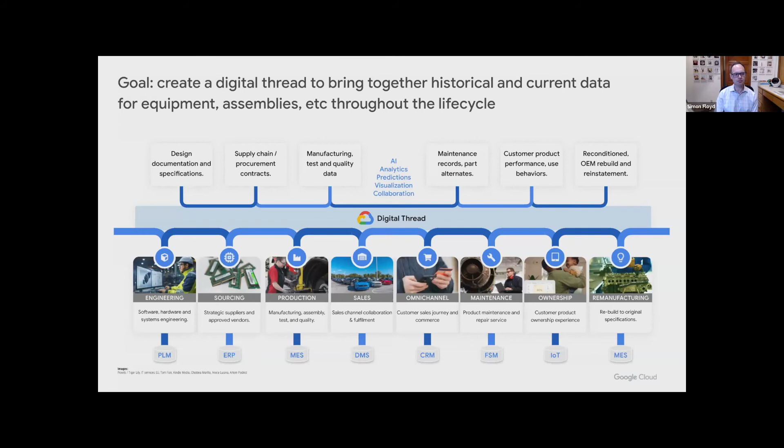Finally, I thought I would make a couple of recommendations. I just had the opportunity, so while I have the floor, I'll share a few insights about how we would think about transformation in this industry. The first is that having the information to drive assessment of condition, and using that to organize how we go about a rebuild or remanufacturing, is really critical. This is how an organization can make money, in our opinion - the information leads us to something that's determined going forward, rather than having to make an assumption or go through exploration of what is required.

On the other side, that's going to require a lot of historical information. Building that digital thread in an ideal world is absolutely what we would want to accomplish. But even at a sensor level, if we have historical information - whether by running the sensor through a test procedure, or we're lucky enough to have onboard capabilities like our aircraft, or more verbose information captured through a telematics program - that is the answer. We don't always have to have absolutely everything in that value chain. Sometimes we can just be tactical about what is required and what we need.